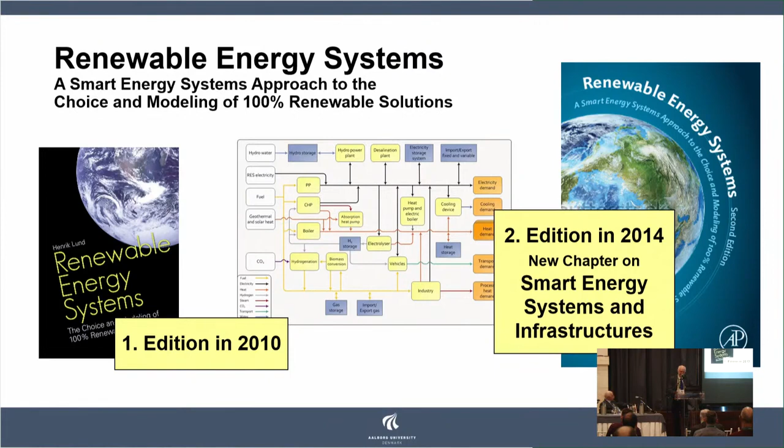What I'll do this year is elaborate more and show how we can do that, and what this means for how we should think when we talk about 100% renewable energy systems. That's why the title is Smart Renewable Energy Systems and a Fully Decarbonized Society. First, parts of what I'm saying here are published in my book. Already in 2014, in the second edition, I elaborated a lot on the smart energy systems approach. But I will update not only what I've written before, but also what has happened since, especially with a look at the climate neutral targets.

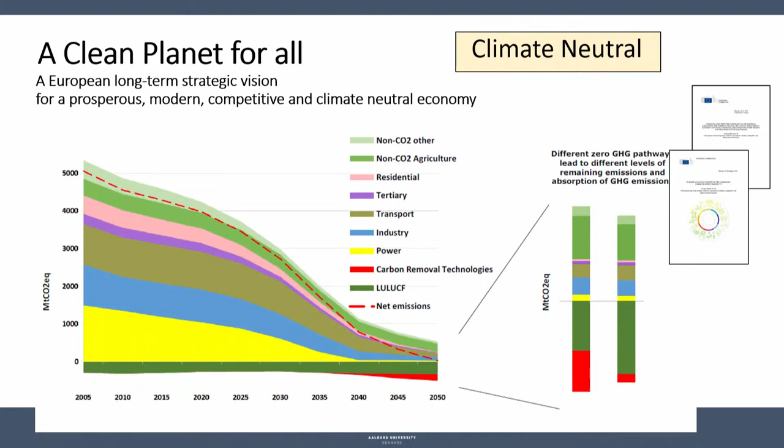As an example, this is taken from the European A Clean Planet for All report issued a couple of years ago, and they use this word climate neutral. And they look not only at the energy sector, but much broader. When politicians set these types of goals and targets, I think it's our contribution from the scientific point of view, and also from industry, to say how we can do this, because it can be done in many ways. No matter if we word it 100% renewable energy or climate neutral economy, there are different ways of doing it.

And what I'm in, and I believe many of you also, we are in the business of identifying the best, the most doable, and the most affordable ways of making this green transition, both from a technical point of view, but also from an economical point of view, and also from a road mapping political point of view. How can we do this, and how can we work as researchers in order to identify the best and most affordable and most doable ways of doing it.

And the way we work with this in my research group, and I guess many others do in principle the same, is to put our energy systems into computer models and then play around with: now if we build a lot of wind turbines, what will happen and how can we deal with that, and many of the other things. And that is also what we do at Aalborg University with this model here that is a freeware, already mentioned by SDEWES. So please download and play with it if you wish.

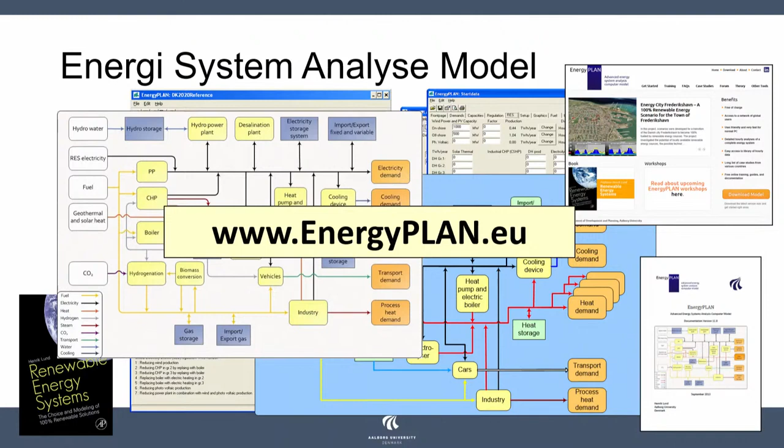When we talk about smart energy systems, and I will elaborate a little bit on that, because this is our suggestion of an approach to take if we should organize ourselves so it will be doable and possible for us to identify the best ways. Then I always start with saying a little bit about smart grid, because the reason why I and others started promoting the concept of a smart energy system is because we once had this smart grid popping up. The earliest mention of that I could identify was this paper from 2005, where the concept of smart grid is mentioned.

And what is said here in this paper is: now we have invented a computer and the ability of being smart and making smart control of what we do. Why not use it? And then they look at the power sector. We can use it in the consumption to be smarter there. We can use it in the distribution and the transmission and also the generation of electricity. And that's what they promote. So let's be smart. Let's be smart grid.

The problem with it, as I looked into it, was there was not really a scientific definition in this paper. And when I was looking for a scientific definition of smart grid, I couldn't, in the beginning, find any. What I could find was non-scientists, organizations like the DOE in Washington, or the International Energy Agency, or the European Commission, and so on. They started to define what smart grid is. But these were not really scientific definitions, in the sense that the reason why they did this was because they started granting money for it, and then they had to define what they were granting this money for. And that's where we had the first definition of what a smart grid actually was.

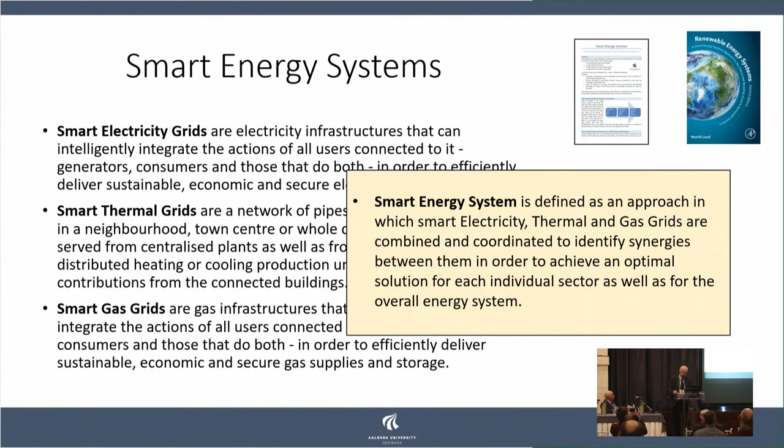But the point we try to make by doing this is that if we really wish to be really smart, then we should not be smart within the different grids and in the different subsectors. We should be smart across the subsectors, and that's how we define the concept of smart energy system: taking a cross-sectoral approach to be smart and also identify the synergies between the sectors. We published a review paper about that some years ago, where we can see that its concepts have been implemented and used in a number of papers since, even though there still seems to be some discussion on what exactly we are talking about and what is the definition. But at least this is developing in a direction where we agree more and more upon that.

But what is a smart energy system? You can say it's an approach to identify the best and most affordable solution. It's sort of a guideline. If you wish to really do this well and be smart, then how should you do it?

You can even say it's a theory, because when we promote this and I talk about it, I make the theoretical statement that if you wish to identify the best and most affordable solution to the green transition, you must take a cross-sectoral approach. You must take a holistic smart energy system approach. Otherwise, you'll push yourself into some corners of the whole problem and identify suboptimal solutions. So that's the idea about this.

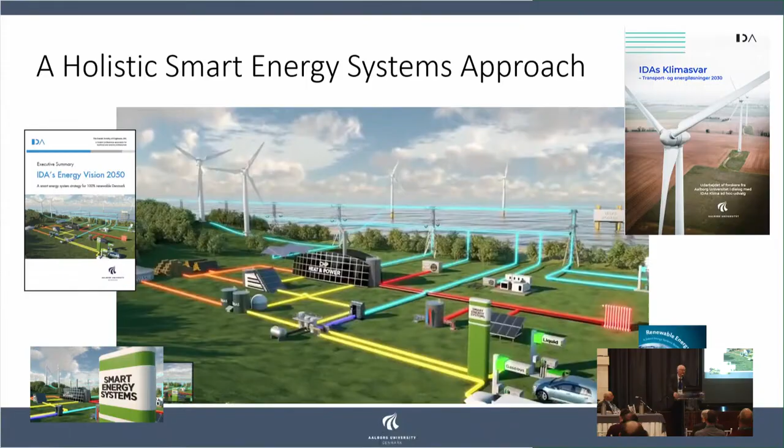And basically, the idea is to recognize that the different subsectors and different smart grids need one another in order to find the best solution. You can say that it's very difficult to green the heating sector without some kind of input from the electricity, heat pumps and the like, and also excess heat from different processes and production. That is the most affordable and best way to green the heating sector. And maybe you cannot do it without certain inputs from the electricity sector. So the electricity sector will have to help the heating sector.

Also, the electricity sector will have to assist the transport, because we should have electric cars but not only that, also all kinds of power-to-X to deal with sustainable aviation and things like that. So we also need the electricity sector to assist the transport sector. But then in return, the transport sector and the heating sector can make a very important contribution to the electricity sector, and that is in the balancing of wind and PV.

Because if we recognize we have to convert some of that electricity into heat or gas or liquid fuel or whatever we need in the other sectors, then we also have the possibility of storing all the fluctuating wind and PV after it has been converted into something that is much more storable and affordable to store, rather than try to store it as electricity consumption or electricity production.

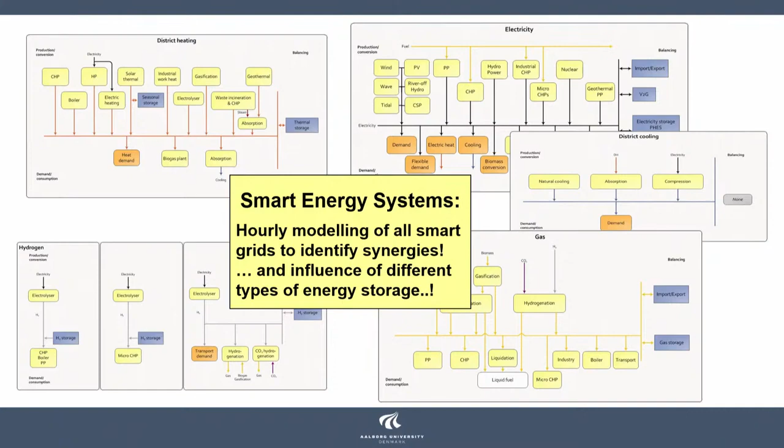And that's what we have designed our tools to be able to do. That is to take all sectors in and make hourly calculations of all the sectors, and also to include as many conversion units as possible and various types of storage, so that we can play around with it. Can we identify those synergies? And can we design a system so we can do with the affordable technologies and don't corner ourselves into being forced to invest in the very expensive technologies? That's the game.

And one of the reasons why this is incredibly important, and why, if you take this approach, you will be able to identify better solutions than if you don't, is that there is a huge difference in cost if we try to store energy as electricity. I define electricity storage as you put electricity in, and then later you take electricity out.

It could be a lot of technologies, of course batteries. It could be, as illustrated here, pumped hydro. It could be converting to hydrogen and back. We don't have mountains in Denmark, I often say, so we cannot use pumped hydro, but we can use compressed air energy storage instead, and so on. But common for all these technologies is that they are in the order of magnitude 100 times more expensive than building a thermal storage.

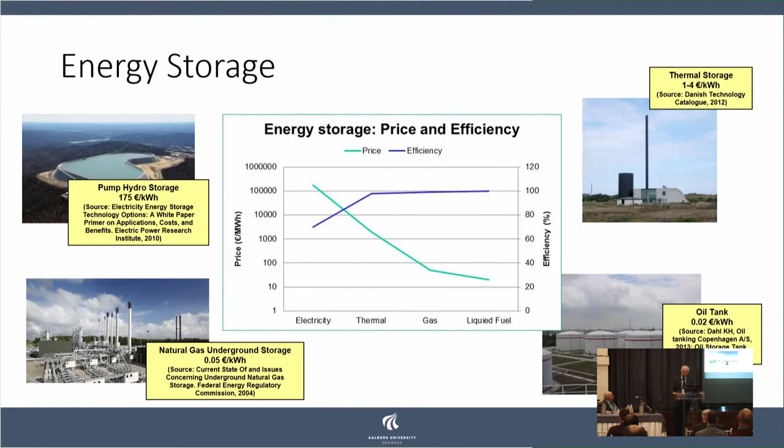And this cost relation is important because if we can design a system in which we do not really need a lot of electricity storage, then that system will be so much more affordable compared to if we can't. And that's why this is important. This paper here documents all the numbers I just used.

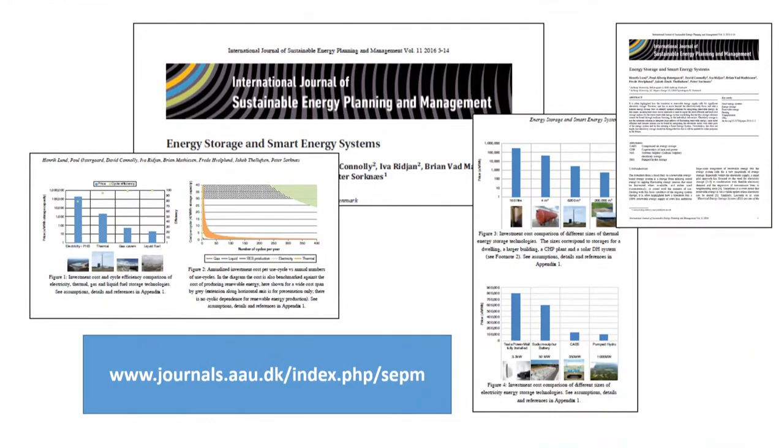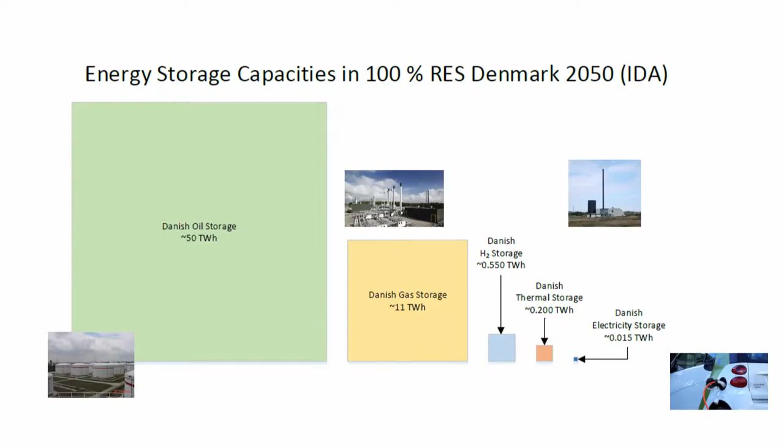And this is a system that we have calculated hour by hour in all sectors, 100% renewable energy in 2050 for the case of Denmark, where we can document how all storage are filled and emptied and all this sort of things, so we can document this can work with this storage as you see it here. And that's good news, because this means that we don't have to really invest in a lot of electricity storage. And that's good news because they are so expensive.

Then one more reason why taking a smart energy systems approach is important is if we take a look at the grids we have. And sometimes I make a competition, especially when I'm in Denmark. I ask people, of the energy we distribute in Denmark, do we distribute the most on the electricity grid, on our district heating grids, or in our natural gas grids? And very often people have the opinion it must be the electricity grid that is the most important, that distributes most.

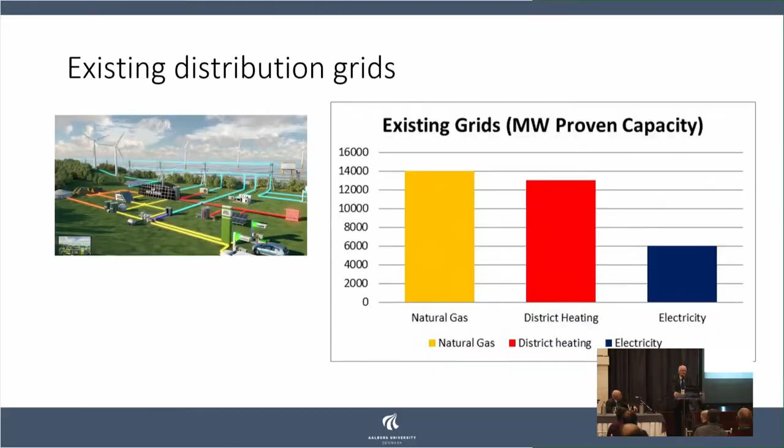And we calculated once, if we put everything from the heating sector onto electricity, that is, converted everything in Denmark into electric heating, then we would have to build a lot of wind turbines in order to supply that, and that would cost a lot of money. But then we also calculated what the cost of the grid would be to do that. And the cost of the grid exceeded the cost of the wind turbines, because to expand the distribution grid in Denmark by a factor of 4 would be extremely expensive.

And then we also calculated, if we do this and we also then need electricity storage, then the cost of the electricity storage exceeded the cost of the grid that exceeded the cost of the wind turbines.

So the idea here is to say that we already have some infrastructure ready. And of course we should electrify a lot. We should have electric cars and also electrolyzers and a lot of things. But there's no need to overdo it, because if we overdo it on the distribution level, then it will really cost a lot of money.

But if we do not overdo it and make use of the existing infrastructure and then add to that more on the transmission level, and the transmission level is so much more affordable to increase than the distribution level, then this is doable. So these three things here with the infrastructure of the grids, the infrastructure of the storages, and the cost of the storage, this is just to illustrate why taking this holistic approach is so incredibly important.

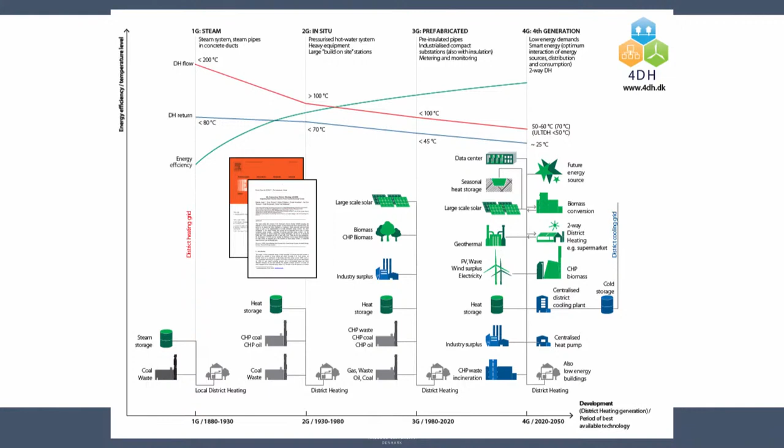So right now all people who have a gas boiler in Denmark, or oil boiler for that matter, or electric heating for that matter, they are calling their local district heating company and want to be part of the district heating supply. And all district heating companies in Denmark are expanding as fast as possible, but still it will take them several years to put all the rest of the customers into the systems.

And then you can say, is this stupid? Because one of the reasons that we have so much district heating and have so much success with it is that we have been producing our electricity on steam turbines fired on coal and whatever. And this is not something we should do in the future, because in the future we should replace these coal-fired power stations with wind and PV. But from what we see, there will be even more excess heat in the future.

And we have looked into in Denmark what we have of industrial excess heat potential that we are not already using. And even though we electrify some of them or put them to biofuels or whatever, we will still have a huge potential in the industry. We also looked into the expansion of data warehouses in Denmark right now, and we are expanding them so fast that if we succeed, then in a few years the potential excess heat from our hyperscale data centers in Denmark will be equal to 1/4 of our district heating demand, quite a lot.

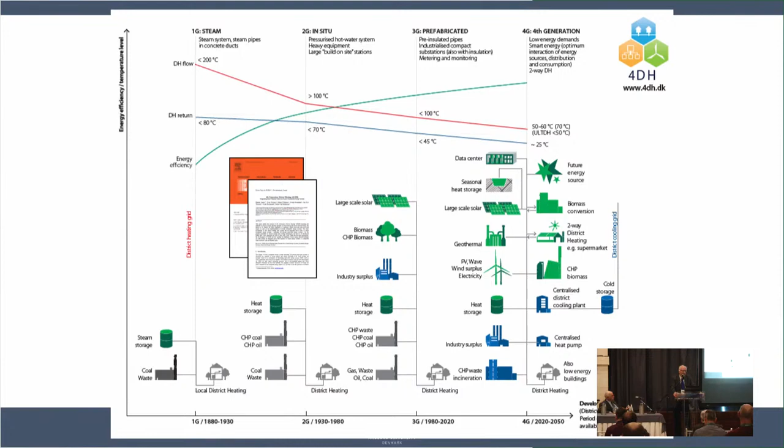The really important thing is that the sources for providing district heating in the future, no matter if it's a heat pump or one of the many resources I just mentioned here, geothermal energy, waste, whatever, can do so much better if they are allowed to deliver at a lower temperature compared to what they are now. So that's what we promote as the fourth generation district heating technologies.

And we have also been promoting this on the European scale, and actually the Heat Roadmap Europe studies, there are four of them now, have shown how it will be both more affordable and doable to implement the political goals in Europe if we include district heating compared to if we do not include district heating. And we also aligned that with what we call Smart Energy Europe, a study where we have looked at the whole of Europe, and we also looked at it at the city level.

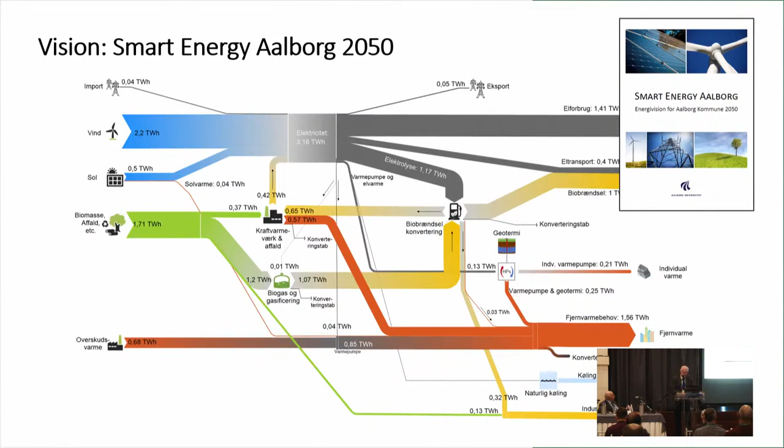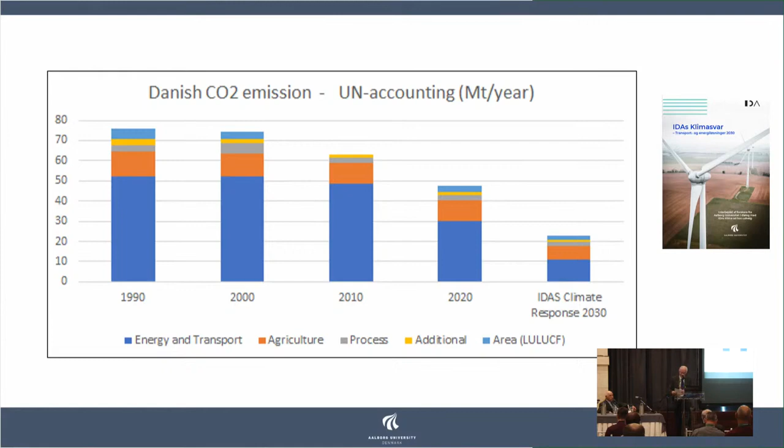But additional to that, we also have agriculture. In Denmark, we have a lot of agriculture. And we have processes from industry and so on and so forth. And all these other sectors also emit greenhouse gases, maybe not all carbon dioxide, but it's still part of the greenhouse gases. So somehow we will have to align ourselves with those sectors so we can achieve it for all sectors, so we can go climate neutral and implement those targets.

So we did a study. We have done a lot of studies, our research group together with the Danish Society of Engineers, starting back in 2006. But recently we did a study where we updated our studies and related them more to the new political goals. And one of the things we had to ask ourselves is, if we make a study on how Denmark should do the green transition, how should we then look upon Denmark as part of Europe, as part of the world?

Because there are so many ways you can do decarbonization and renewable energy. One way is to import ethanol from Brazil, and then you've more or less dealt with the transport sector. Or you can build a lot of wind turbines and then export them and claim that they are replacing coal-fired power stations somewhere else.

But what we said to ourselves, and sort of produced a guideline for how to think about this, is that it will not make any sense that one country, no matter if it's Denmark or whatever country it is, does the green transition if all the other countries are not doing it. Then we might as well forget about it. So this is something we do together, this is something we do in parallel.

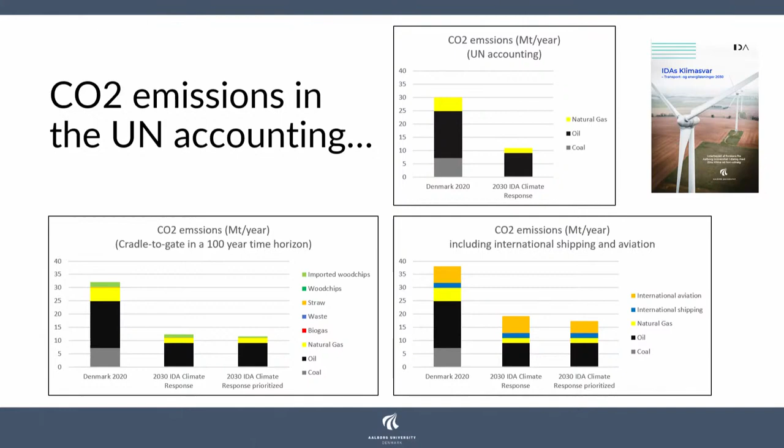But what is really important is when we identified our share of international aviation and shipping, and you can see that to the right there in the orange and blue color, then it really changed the whole picture. Because if we include that, then it's a quite different ball game. Then we really have a much stronger challenge than is so far recognized by the politicians.

So we did a strategy for 2030, and even though the Danish Parliament has the target of 2050, we said maybe we can do it a little earlier. So we put 2045 on the agenda. And now we have started a race in the Danish Parliament, where we have 12 parties, and some of them then say, maybe we could do it even before that.

And so now I have started saying, maybe it's not only a race on how early we can do it, but also a little bit about how we do it. So that's the issue right now. But what we then defined is a fully decarbonized Denmark by 2045 in all sectors.

And the important part here, when we see how we should collaborate with the other sectors, is that we cannot really see in Denmark that we can bring some of the other sectors to zero. We can do a lot within the agricultural sector, but we don't think we can bring it to zero. We think we still will have to produce some cement. We have a cement factory in Aalborg, and we don't think we can bring it to zero.

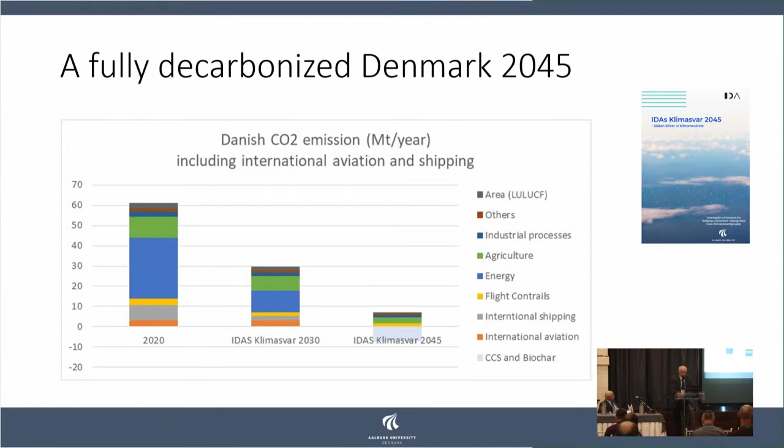Because as we see it, biomass becomes essential in this process, because if we need to make it possible for CCS or biochar to provide that sink that can compensate for the other sectors, then we need the biomass. And we have been debating a lot in Denmark. Should we have biomass at all? Is it sustainable? Should we do without it?

Our approach from our study is that we should not dismantle biomass. We should further develop it in the direction of making sure that it's sustainable, and we should also actively do things so that we can make use of residual resources that are sustainable. And what is also important, develop it in the way that we use it in the correct way.

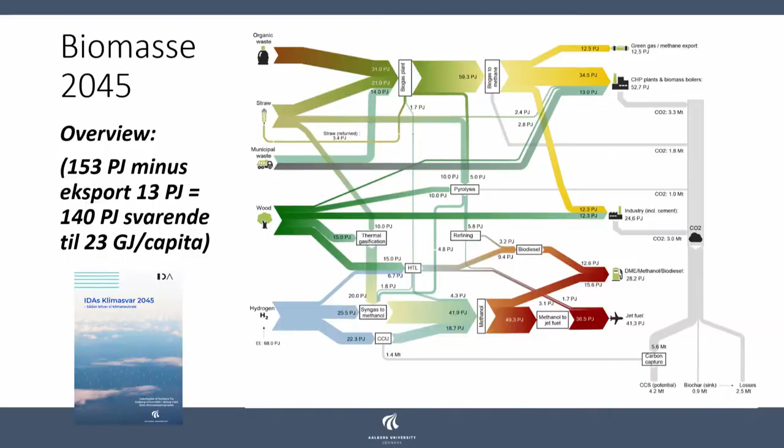And then at the same time, as you can see to the right, we also identify all the point sources we have, both in terms of time and variation and what it will cost to bring them to carbon capture, and also what type it is. And then we identify what we need for carbon utilization, CCU, the circular solution, and what we have left that we can potentially use for storage and biochar. And by doing it this way, we believe that we can make a scenario that is sustainable in the ways I just mentioned.

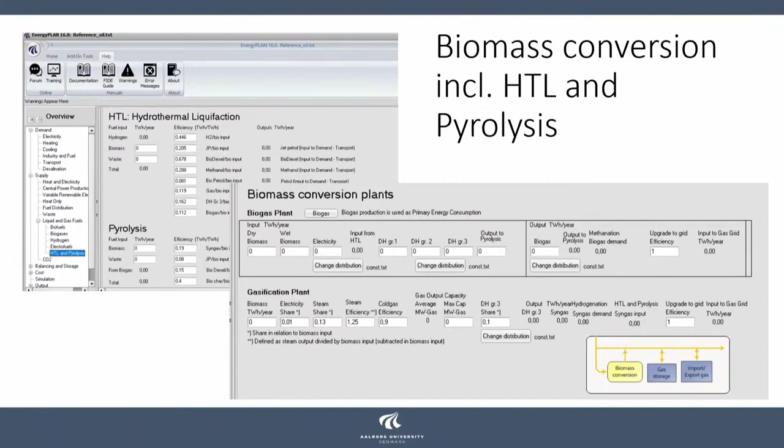Time is running, and we should also have time for questions before lunch, so I'll close very soon, but I'll just mention here that this is where we have really expanded our energy system analysis model. This is to be able to look into this relatively complex issue of dealing with the biomass in a good way. We also published 3 papers about this study, one of them on the overall study, one on the biomass issue that I mentioned, and one with a focus on transportation.